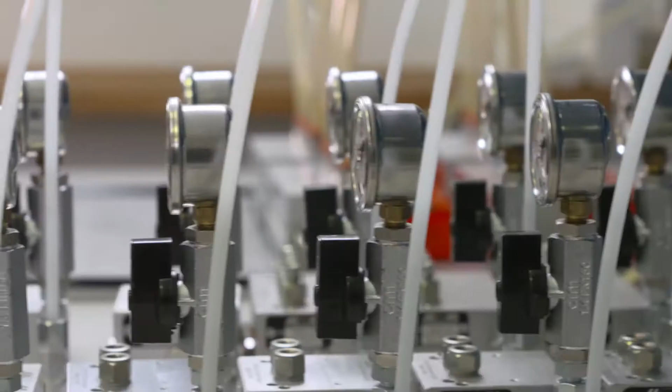MWM Schmieranlagen is an all-Italian story made up of study, insights, passion, creativity and perseverance. It is a story that for over 30 years has brought together creative flair and the rigour of engineering.

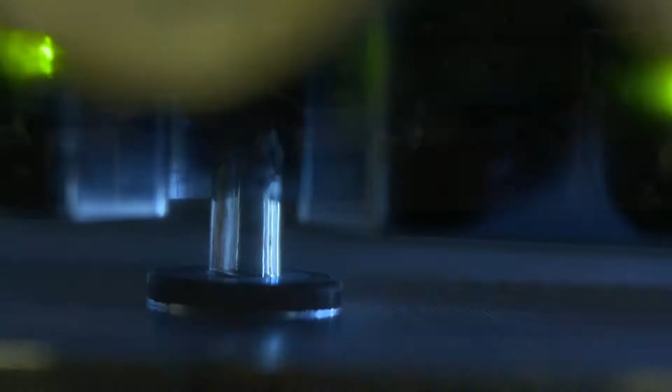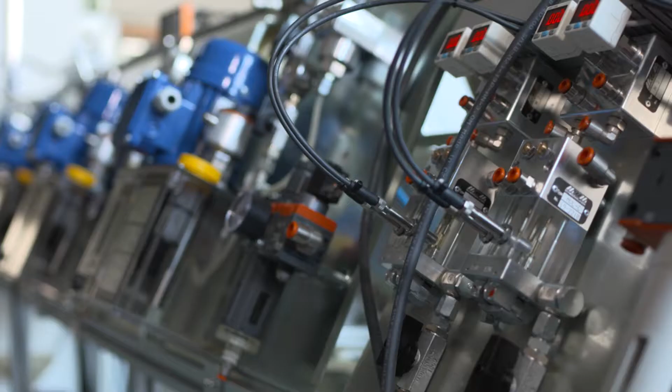MWM Schmieranlagen is a company that operates at a very high level of performance in a niche sector: design and production of minimal lubrication systems. These systems are able to deliver a minimum and extremely exact oil metering for the lubrication of high-speed precision rolling bearings.

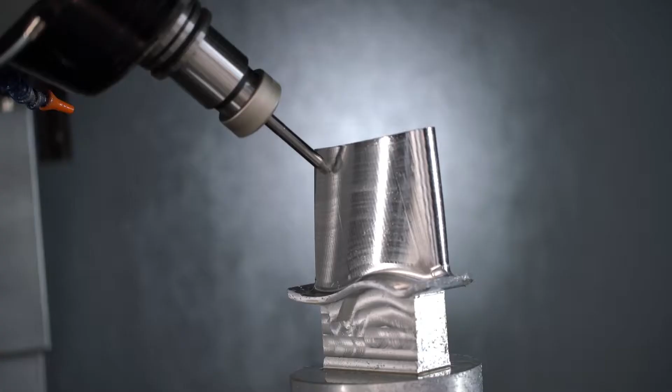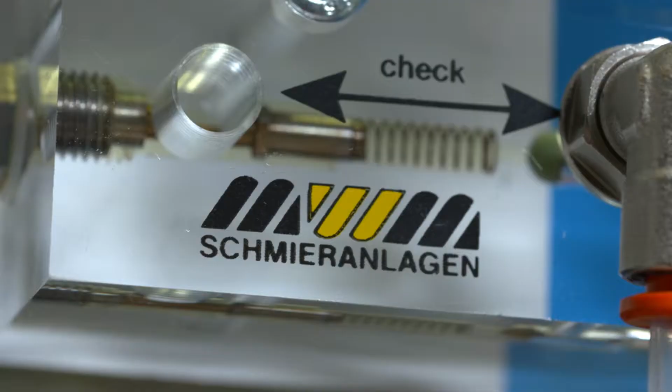Integrating mechanical, hydraulic and optoelectronic elements, MWM produces oil-air lubrication systems with electronic detection sensors. Minimal lubrication is a specialized sector of automatic lubrication technology where tiny quantities of lubricant are supplied in a constant, continuous and controlled way.

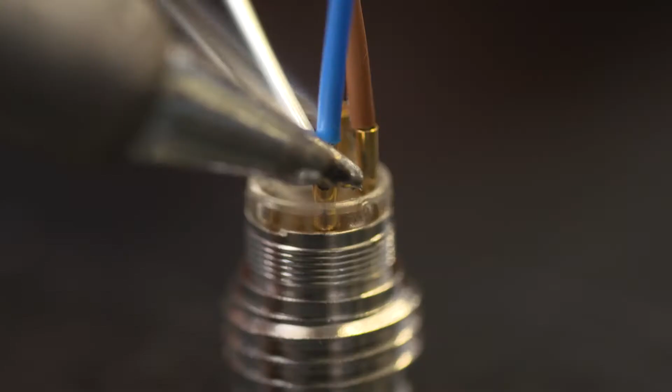I was fascinated by electrical engineering, so I decided to continue my studies at university. I enrolled to study mechanics at the Politecnico University in my city, Milan. I graduated in 1982, specializing in electronic instrumentation applied to mechanics, and this has remained the fundamental theme of my work.

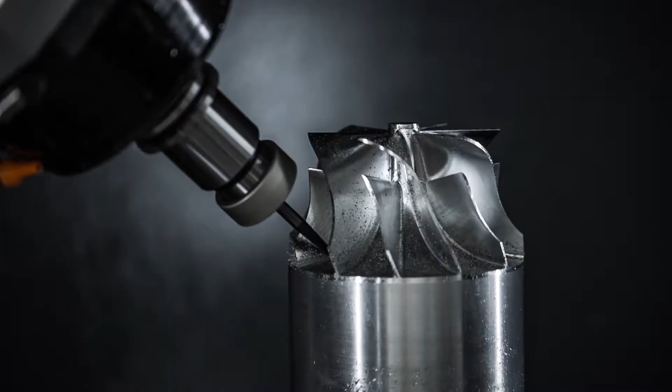That was the time when the first numerically controlled machines and electronics-enabled cars were designed. The goal was to develop diagnostic signals that would allow communication and monitoring in machinery.

I remember one of my university teachers saying to me one day, "Always do what you're passionate about. Your goal is to become a specialist, but above all, to be number one in your field."

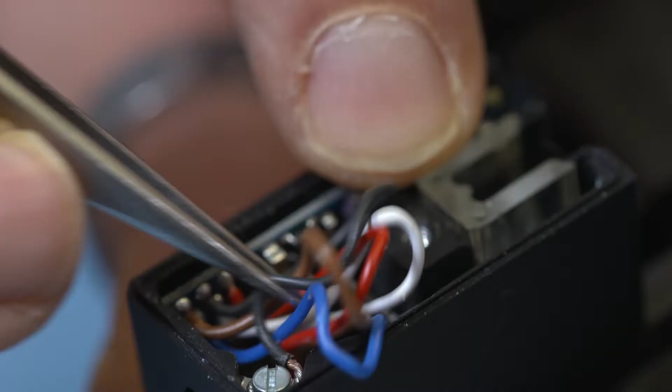As I was already working for a German company that produced lubrication systems, I decided to specialize in this and develop the concept of minimal lubrication. And this concept was not popular in certain environments where the habit was to use huge amounts of lubricant and where there was a consequent interest in producing large tonnages.

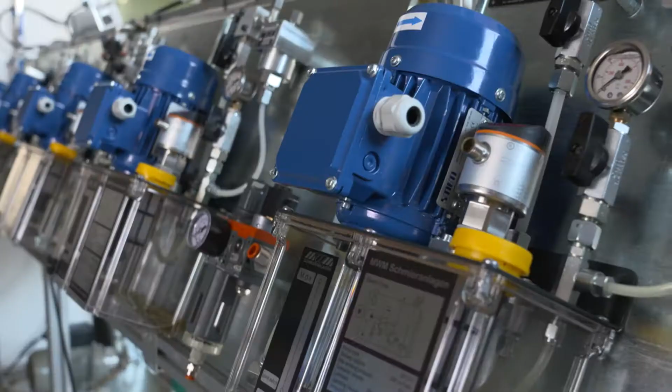That was how we developed the first patents for microlubrication, which we later named MQL, Minimal Quantity Lubrication. And then, in the internet era, this also became the name of our website, www.mql.it.

One of our first challenges was to solve a lubrication issue for Ferrari, which had contacted me regarding the lubrication of high-speed bearings in their Formula One engine test benches.

Working at Maranello was a great honour for a young engineer. That was when I understood that to become number one in your field, the secret was to persevere and search for solutions in synergy with the customer.

And to do this, I also had to have a fundamental resource, a research and development facility that would allow me to test and implement my innovative products.

And so it was that I found myself once more at the Politecnico di Milano, where I had studied and grown up.

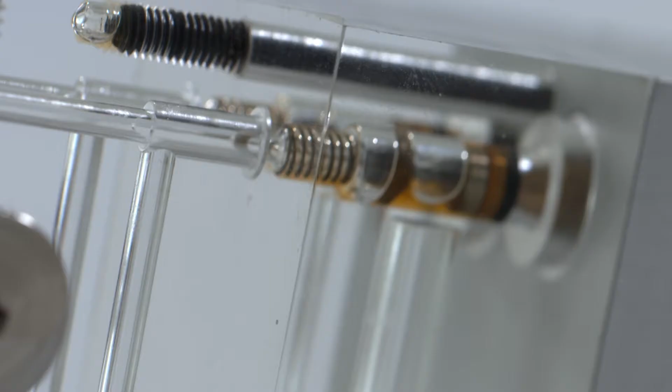And it was thanks to a process of synergic research between the company, its customers and the Politecnico di Milano that the first patents in the minimal lubrication sector came to light. MWM was the first Italian company to patent an oil-air minimal lubrication system with an integrated electronic detection device.

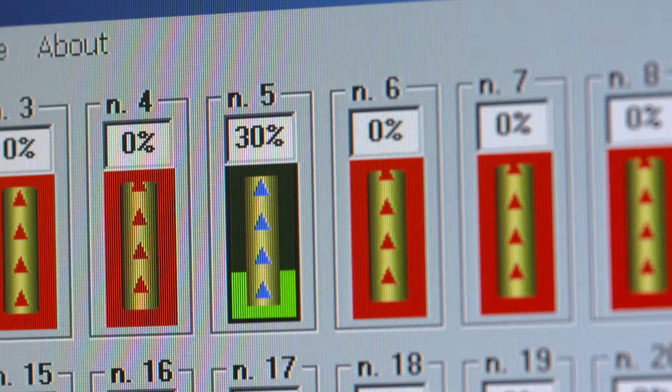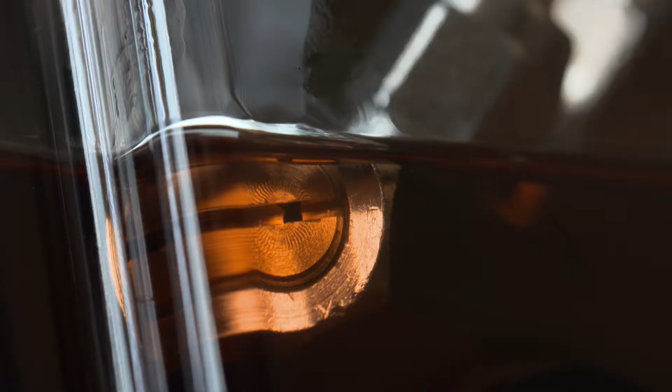This technique allows us to combine high performance, efficiency and respect for the environment. Minimal lubrication, MQL, requires far less lubricant and causes less pollution than either mist systems or recirculating oil lubrication systems.

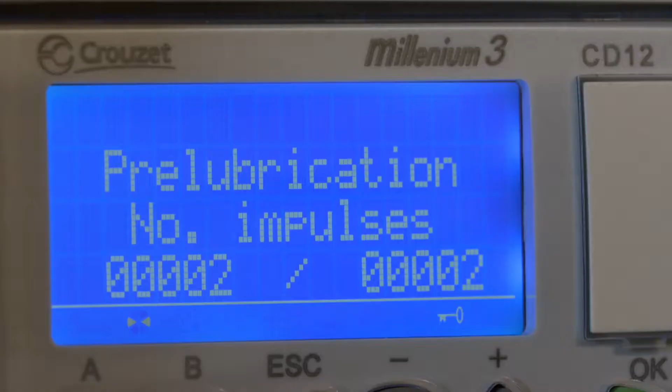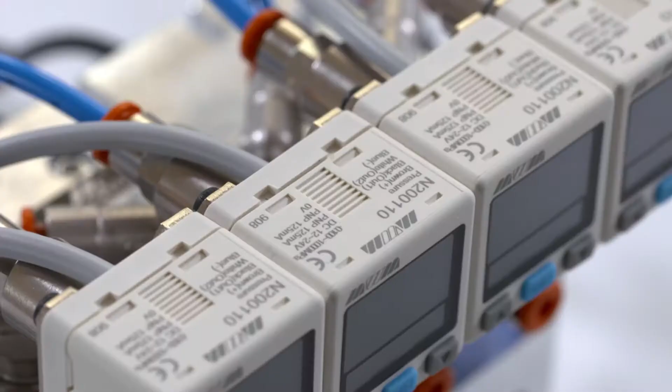We work with micro flow rates by using volumes of just hundredths of a milliliter per hour distributed constantly and continuously. For example, a flow of about 3 drops of oil per hour. And it is the MWM mixers and systems with their own control sensors that enable us to manage the supply of tiny quantities of lubricant with great precision.

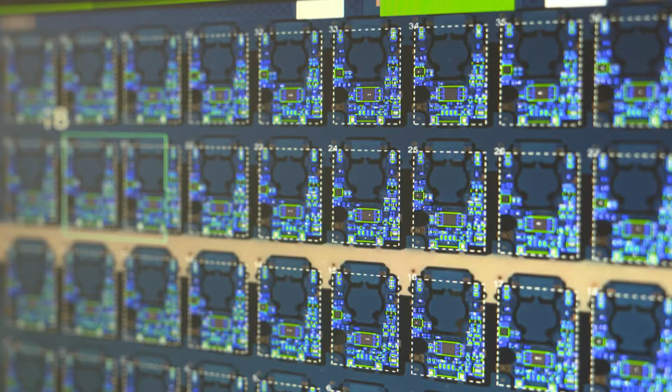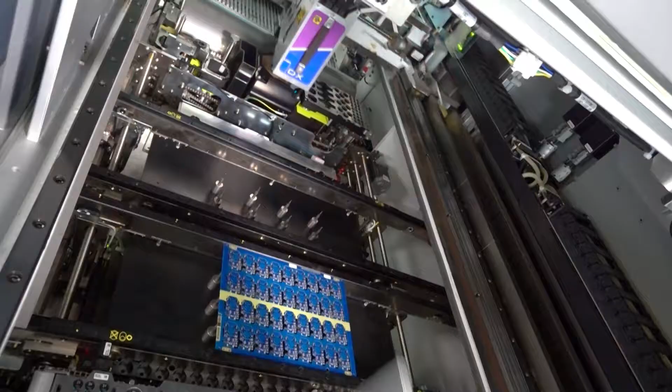Our sensors and electronics are built by a strategic partner which is of great importance to us, BTSR, world leader in the production of electronic sensors, produced with cutting-edge technology and assembled and tested one by one in an air-conditioned and constantly controlled environment.

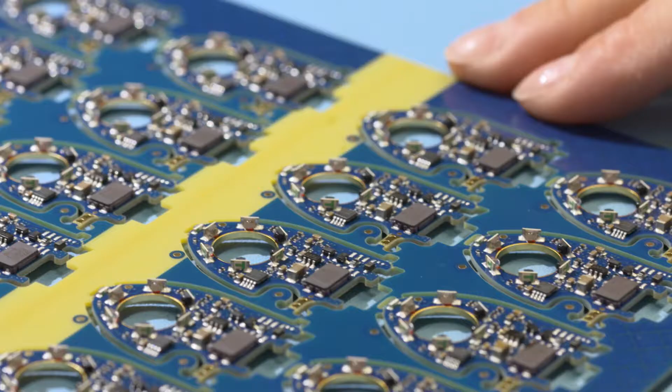The patented MWM oil/air mixer contains an optical sensor that detects the small quantities of lubricant supplied using a precision dosing element. These small volumes of lubricant are fed by a blast of compressed air so as to generate a continuous minimum flow of lubricant to the lubrication point, normally a high-speed bearing.

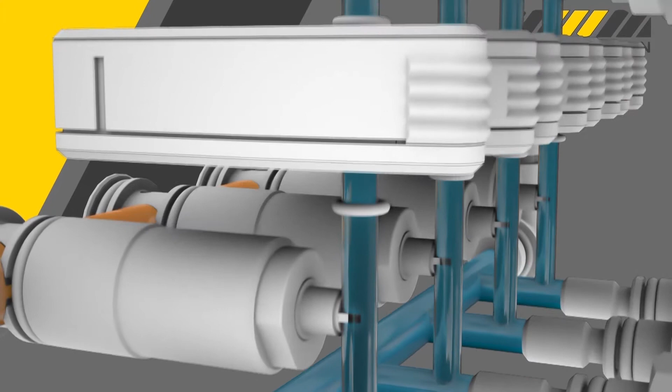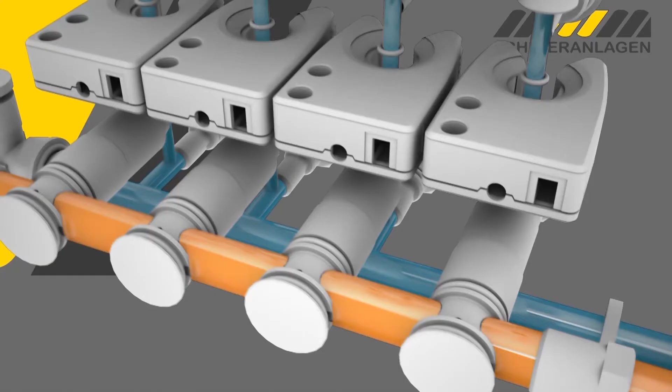This ensures the continuous detection of the flow and of the whole lubrication system. This allows higher performance and minimal use of lubricant, avoiding overheating due to hydrodynamic friction, a continually monitored technology enabling a constant minimum operating temperature.

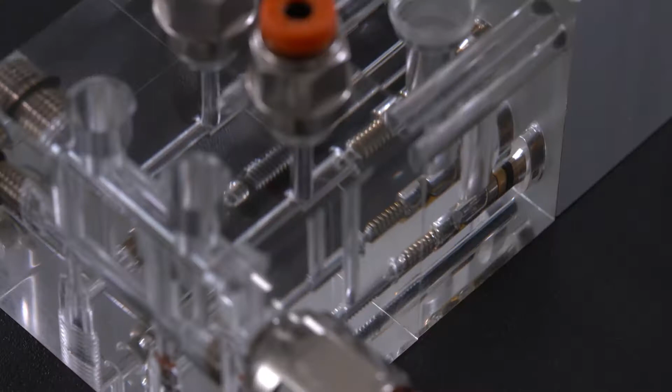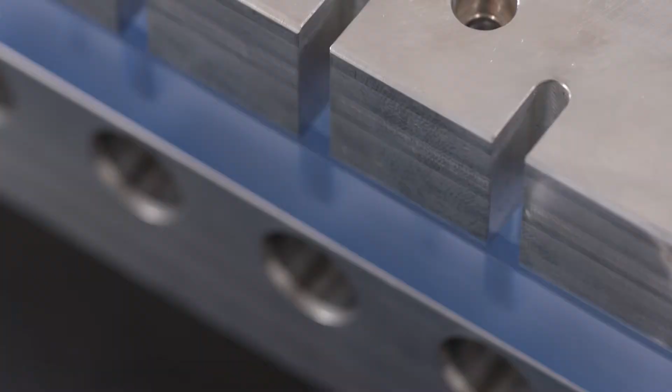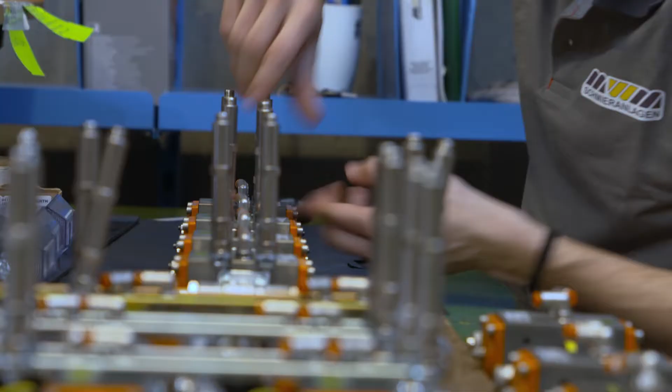Thanks to the customization of the detection software, MWM is able to conceive different systems for each request. MWM products combine craftsmanship and high technological standards. Each MWM minimal lubrication system is assembled manually with individual components which are the product of highly advanced technologies.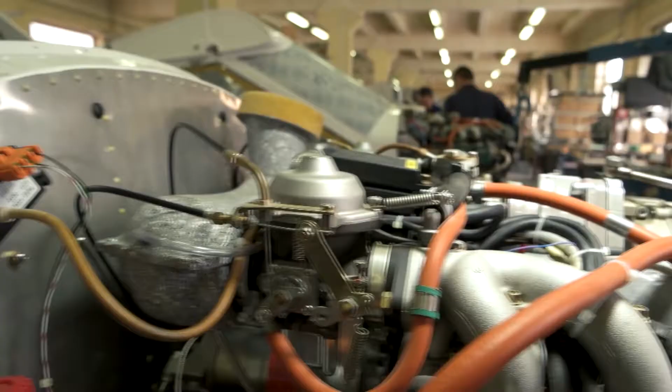For our customers, production must be continuous and monitored, minimizing any production downtime so as to avoid unnecessary costs. We offer our services to the automotive and aerospace industries and to all other fields involving high-speed applications, such as centrifuges in the chemical industry.

We're present in all the most important production centres worldwide, above all in Germany and in the Asian market, Japan, Korea and China, and obviously also in Italy, where our company was born and grew up.

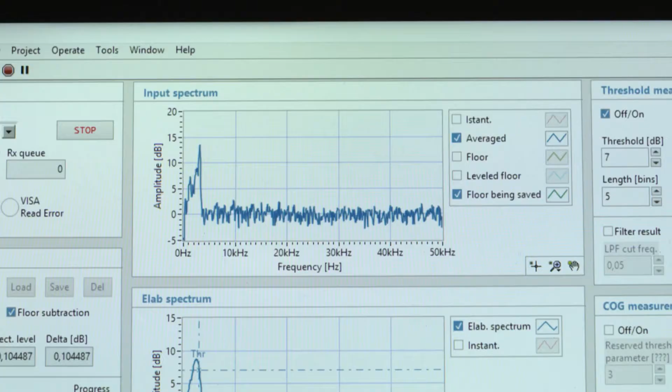Over the years, we have developed new research projects in collaboration with the Politecnico di Milano, leading to new international patents, such as the laser sensor for measuring quantity of lubricant and optoelectronic sensors for measuring small flow rates of lubricant in air-oil mixtures or oil mist.

Among the various services, MWM provides its customers with a series of backup systems which can be sent out within 24 hours from the request.

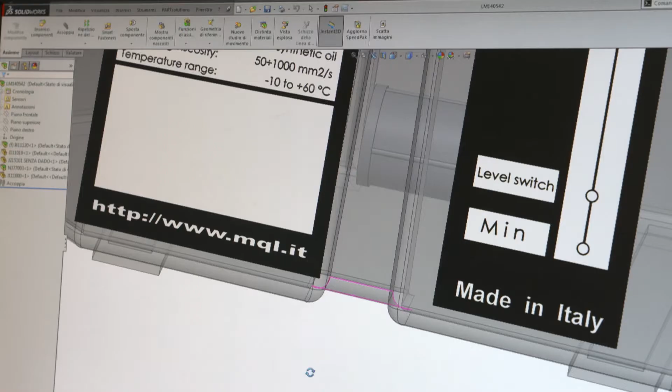But it is research and the constant challenge of finding high-performance solutions which have made MWM Schmieranlagen a leader in the manufacture of compact minimal lubrication units for high-performance industrial machinery.